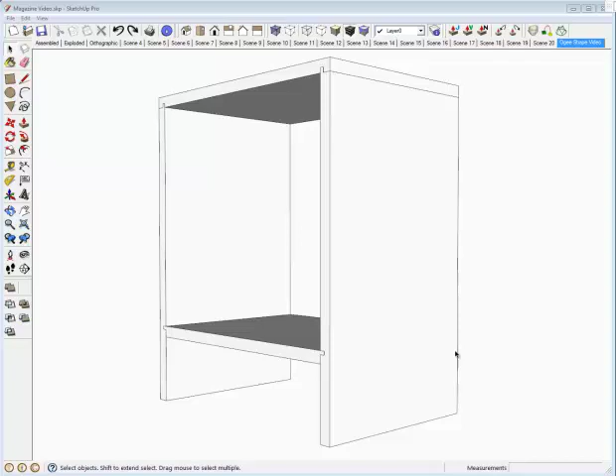Here is the magazine rack ready for the Ogee shapes. First, I'm editing the side component, and then I'll zoom in here and place the guidelines to help us place the Ogee shape.

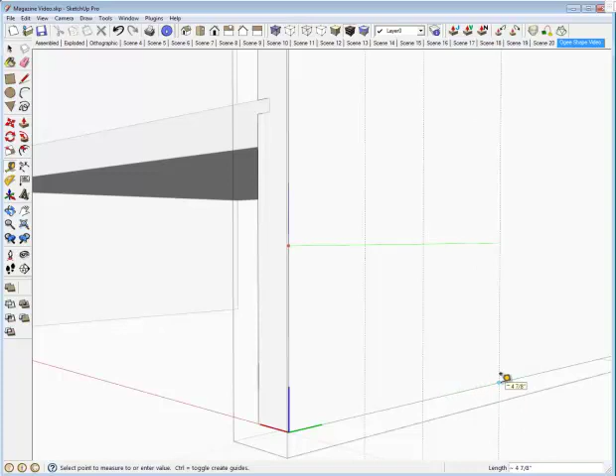First, the vertical guidelines: one at 1 7/16, I'll type in the value, and then there's one at 2 3/4. Type that in, and then there's one at the center line, and I'll go down and wait till I get the cyan color on the midpoint of the edge and click for the center line.

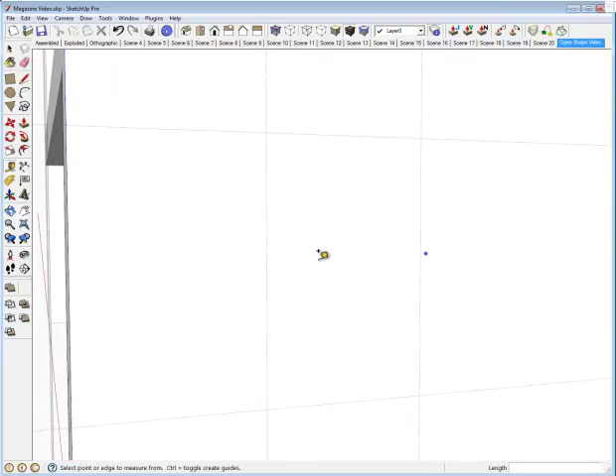Then the horizontal guidelines, one at 1 1/8 and another at 3 1/4. I type that in. Now I'm ready to start some of the shaping here. First, I'll grab the line tool and make that diagonal line to help us with the Ogee.

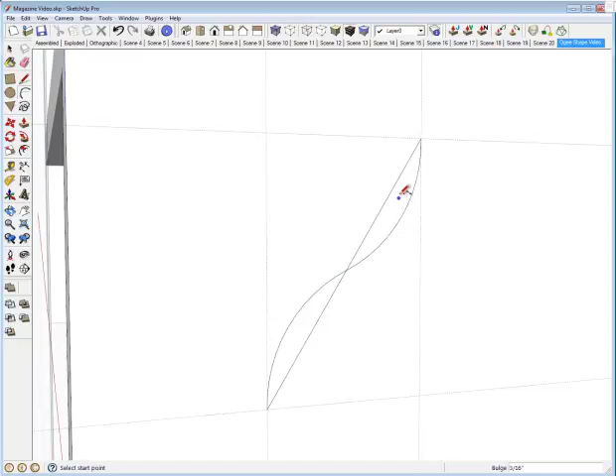Pick the arc tool, click on the end point and then the midpoint, and bring the bulge out to 3/16 of an inch. Make sure you see the blue dot to ensure that you're on the face of the side.

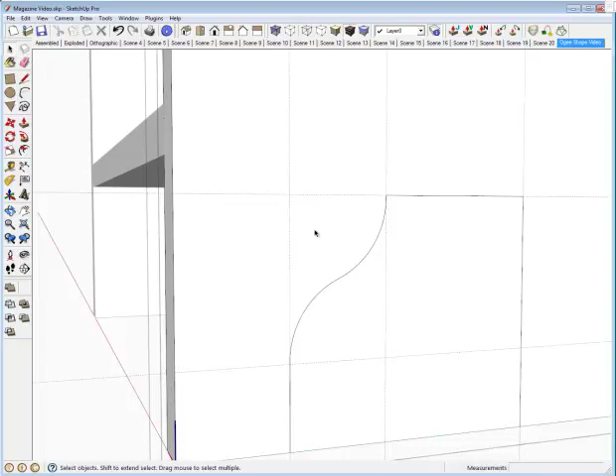Now we can delete the extra straight line segments and finish up the Ogee shape with some lines down the center of the side and then over to here and up to finish the shape. Pick the select tool and double click to get a good look at that shape and the face of the shape.

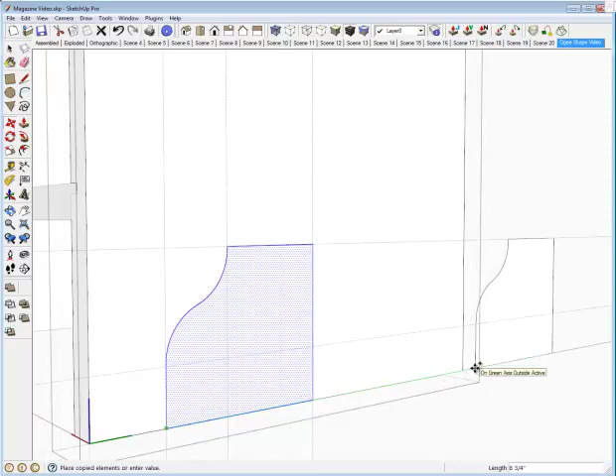We need a copy and a mirrored copy of that shape to finish the Ogee shape. So I'm picking the Move Copy tool, hitting the Control key for the copy, pushing that copy over to the right off to the side, and then right-clicking and doing a flip along the green direction, bringing that copy, which has been flipped, back to the center line, connect.

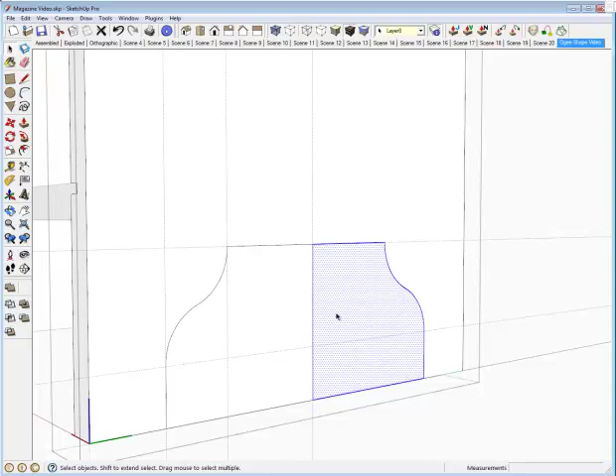Now we need a copy of this shape. We'll use it later in the front of the magazine rack, so I'll double click on that shape and make a new component called Ogee shape. Make sure that the replace selection with component option is unchecked, and then click create.

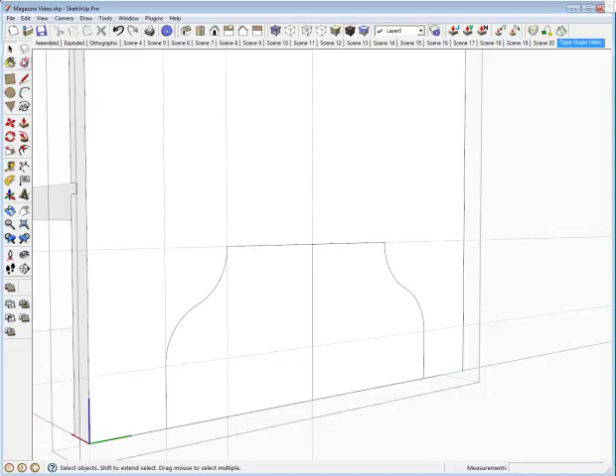And we got a center line that we can get rid of with the eraser tool. Now we're ready to do a push-pull and open up that whole side shape. We can click with the push-pull tool on that back edge over here. Click, and we've got it.

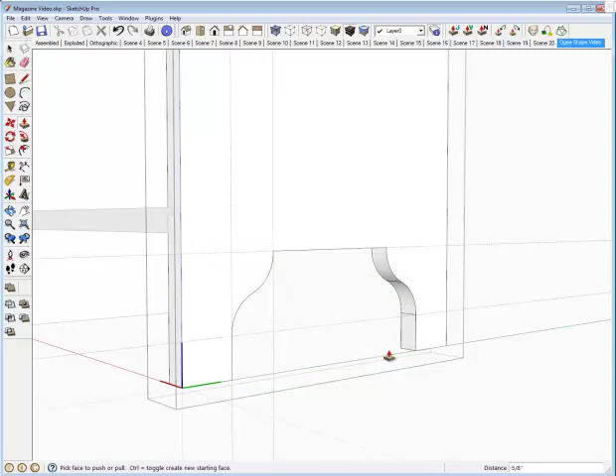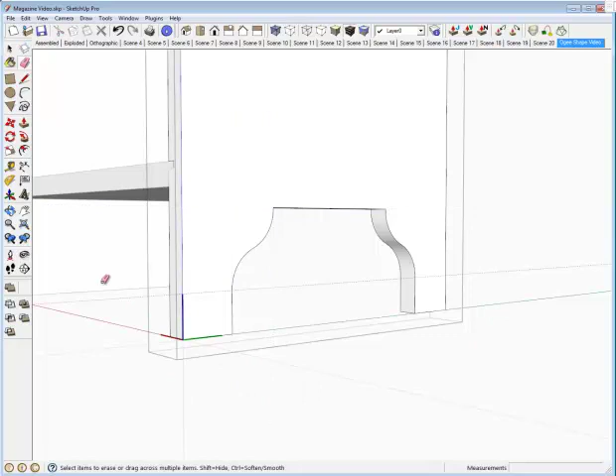Now there's some extra lines in here that we can soften and smooth with the eraser tool, tapping the Control key and then clicking on these extra lines to soften them and make them go away. Then we can delete the guidelines that we've placed by holding the eraser key down and swiping across the guidelines, and then close the component. We've finished the shaping of the side.